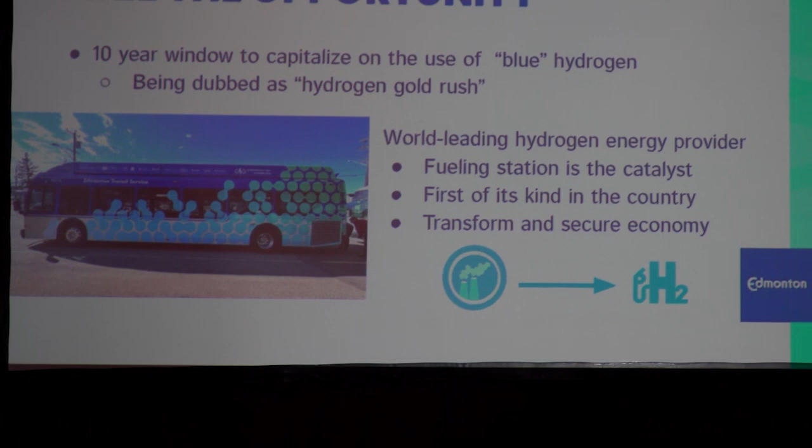We want to be a purchaser of hydrogen and encourage that industry growth around the region itself. The last thing I'd say is, for us, we're looking to seize that opportunity. It's really been dubbed the hydrogen gold rush in this industry. It's a multi-trillion-dollar industry. This is our actual bus here from New Flyer.

So it's a New Flyer FCEB. We're doing a range test on it through the weekend here when it's -20. So all the New Flyer folks are looking at me, but we're excited for what that can achieve.

We've gone through the battery electric side of the world. We know what range looks like, the environment that we're in. We're excited about the opportunity that this bus provides for us moving forward, but we're also really excited about the opportunity that this is the catalyst for change for the city of Edmonton.

We're looking to change that narrative of oil country to a more sustainable fuel, and it starts with the buses. It doesn't end here. Our program grows beyond this to buildings, to infrastructure, to other parts of the region, to look at hydrogen as a blending fuel, as something we can use on buildings. But it's all going to start with the bus side of it for us because it's our most opportune transition.

When we look at the heavy-duty side of the GHGs and the bus opportunity we have here, with 50% of our fleet almost coming due in the next little while, we've got a great opportunity to look at that conversion and really drive the window on change for the hydrogen economy in Alberta.

And like I said, it'll go beyond these buses themselves. But we're really excited about what this means for us and what it means for the future of transit in our region, and obviously what it means for our ability to compete on a world stage in delivering hydrogen to the world too.

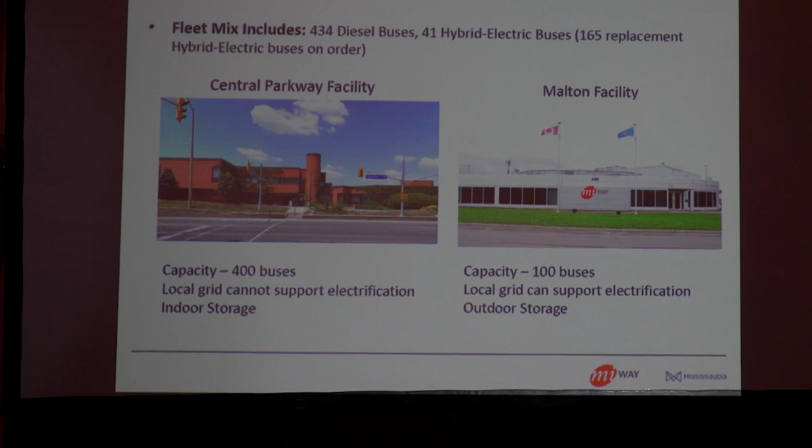we were told by the local utility that frankly there's just not enough power in the neighborhood to support the electrification of that facility. And oh, by the way, unless a lot of your neighbors become energy hogs, they've got no plans of upgrading the local network. So if you want to electrify that facility, you're going to have to pay for some significant upgrades to the local electrical grid to feed that. So that's a big challenge for us.

The second location is up at Malton, smaller, about 100 buses, but of course it has outdoor storage, but there was space for a fueling facility, whereas at the other location there wasn't. So our project ended up being up at Malton, and it's outdoor storage, which is something nobody's really done in the North American context in what I would call moderately cold weather. It's probably not Edmonton scale, but certainly cooler than California. So our project is really going to be based at that Malton location.

And we currently running all diesels. We have a number of hybrids on order, which will help us in the short term. But based on our study, we can meet our 2040 targets, provided that we completely transition to zero-emission buses starting in 2028, which seems a long way away, but really isn't when you look at all the challenges of electrifying garages and things that other people have talked about.

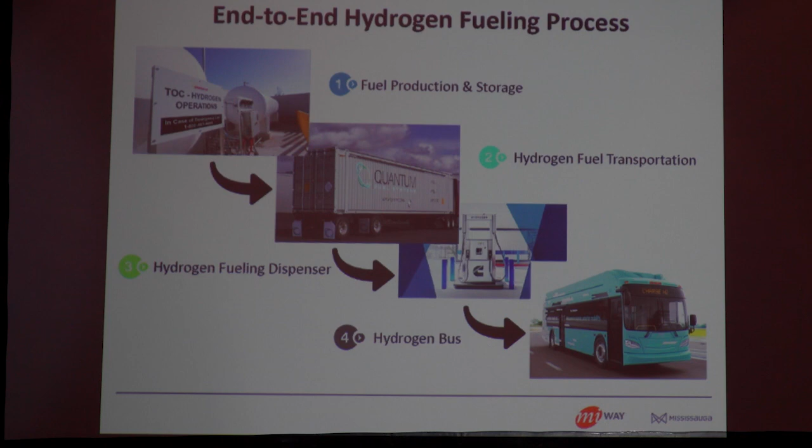So we worked on developing what that would look like. So basically compress it at the electrolyzer, put it into the tube trailer, drag the tube trailer to the bus depot. You need a bus dispensing, you know, for the fuel at the garage, and then of course you need the bus. And so you've got the production, you got the transportation, you got the dispensing, and then of course you got the consumption, an end-to-end fueling solution.

And these are some of the benefits of hydrogen. You can see them there. They're pretty obvious. One of the key things about this project is it's scalable. We started with 10 buses. Obviously, the economics are really tough, but you know, even if you double it down, it gets expensive. And but you know, there are lots of benefits, but you got to start somewhere.

And to some extent, this project's been suffering from what is known as the chicken and the egg, which comes first. Well, you need both.

And our current challenges are availability and the source of green hydrogen. It's really limited and it's really expensive, particularly when you look at having to buy electricity at full market rates, which just makes it so much more difficult, particularly on Ontario. And you know, the production really depends on, you know, okay, can I do it in off-peak power? Is the demand high enough that you can get the industrial rates? There's a bunch of complexity that goes around with that electricity pricing.

And you know, you need that end-to-end solution. And most transits really aren't set up to manage fuel. We know the bus business, we know how to put service out, we know how to fix buses, buy buses, plan service, but we really have never been in the energy piece. In other words, I have a contract, somebody delivers something to my doorstep, I need it, I use it, but I don't have to worry about anything that happens beyond the pump.

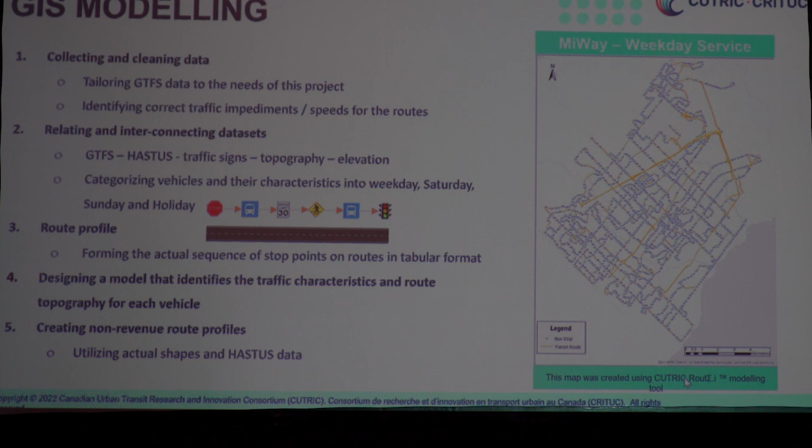This is just the feasibility and phase 1 that Geoff mentioned. When we're talking about the whole implementation work, there are more elements attached to that. So in the GIS modeling work, there's a little bit of an example on how we are doing it. We are going from weekdays, holidays—we are collecting very detailed data.

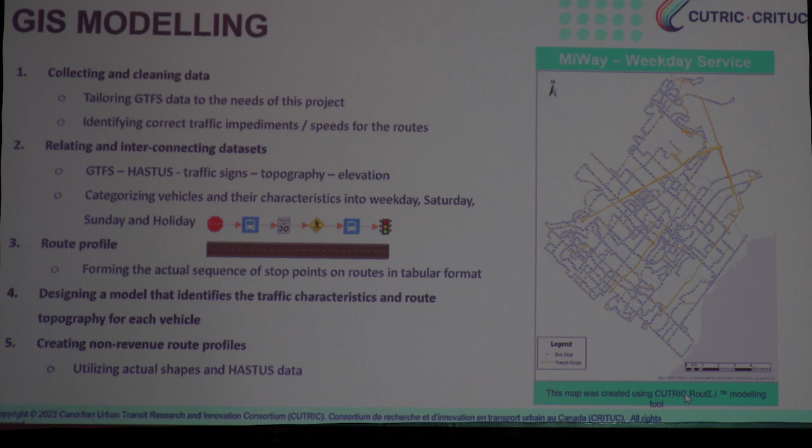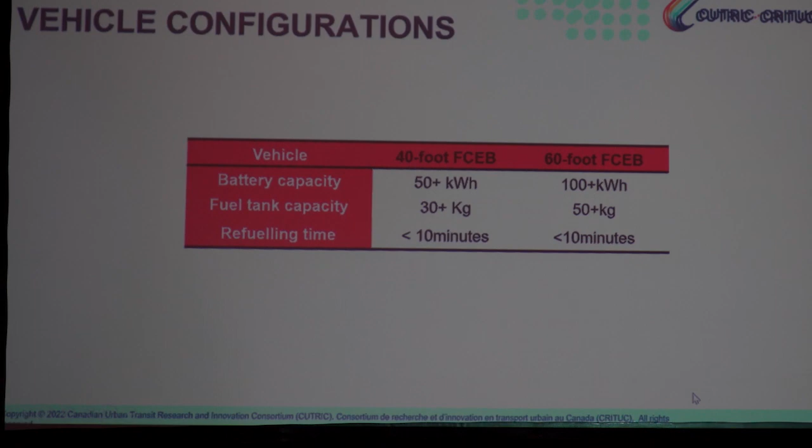Followed by that, this is a slide talking about vehicle configuration. Since it's an anonymized presentation, we are considering 2 fuel cell buses with 2 bus sizes, 40 feet and 60 feet. The vehicle configurations displayed here are anonymized. The battery capacity is approximately 50 kilowatt-hours for the 40 feet, and 100 plus kilowatt-hours for the 60 feet. The fuel tank is similarly approximate, and the refueling time is also an approximate vehicle specification consideration. For this work, I'll be showcasing some examples of vehicles with a diesel heater and one without, but most of the examples shown here are without diesel heaters.

With that, the first step of simulation is generating duty cycle. What do we mean by that? To accurately model these buses, CUTRIC divides the whole scenario into light, medium, and heavy duty - like the best case scenario, the average, and the worst case scenario, meaning packed with people, worst climate, and so on.

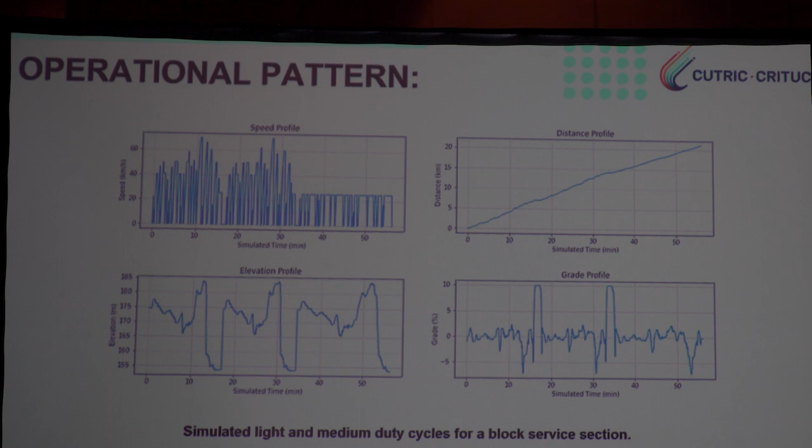These are the simulations we conduct, the operations patterns. The team does a speed profile, distance profile, elevation profile, and grade profile, and this results in the fuel efficiency. Fuel efficiency is defined as the ratio of the fuel consumed for the operation of a particular block and the total distance traveled - how many kilograms of hydrogen per 100 kilometers.

If you compare the 40 feet and 60 feet, our study showed that for weekdays we have 6.93 kilograms of hydrogen per 100 kilometers, and Saturday and holidays are similar. However, with medium and heavy duty, consumption increases significantly, and the same with 60 feet buses - it's definitely higher. With the diesel heater, consumption is lower compared to without it. One can ask why we're doing both - just to understand what the present possibilities can look like with or without, and what the consumptions and fuel efficiencies can be.

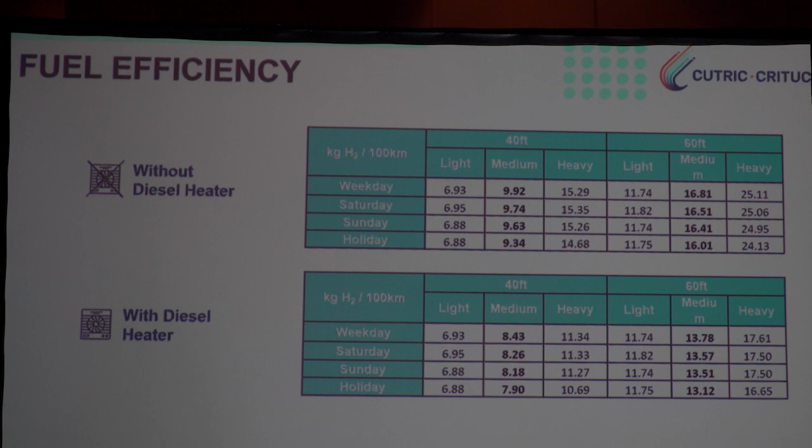We're going to explain one of the scenarios, without a diesel heater. What we understand is we're going to talk about the success rate of these buses, and when we talk about success rate, we consider two scenarios: one without any refueling, and what happens if we add another refueling option.

The hydrogen fuel consumption - this data showcases how much kilograms of hydrogen you really need, and this is again without the diesel heater. I think I have a slide with the diesel heater too, but more or less the ballpark numbers are mentioned. The weekly consumption for 40 feet is 72,000 kilos - this is just without the diesel heater.

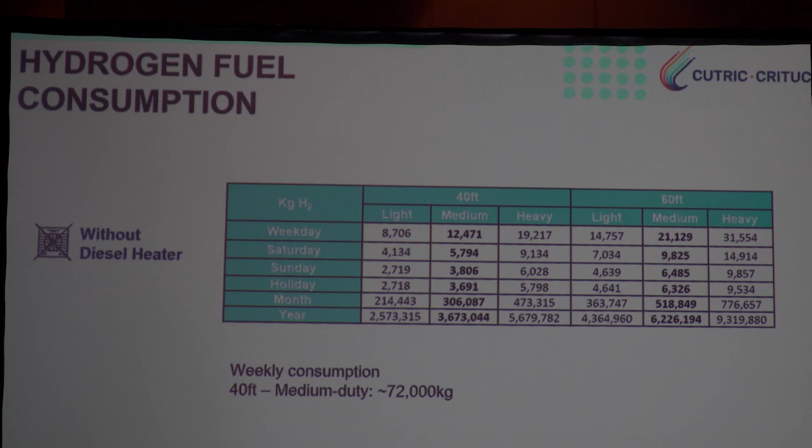Let's quickly talk about - how much time do you have? Two minutes. Oh, of course, multitask.

All right, so now we're talking about GHG. This is the biggest benefit for fuel cell electric buses. As you can see in red for the diesel buses, we have a pretty large emission, and as soon as you introduce the fuel cell, that is the biggest achievement here.

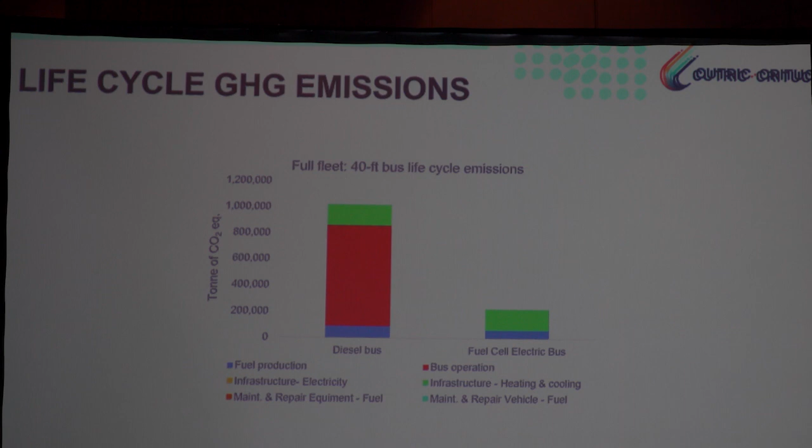Now we're going to talk about the total cost of ownership. That's also part of our work, and it shows that if you consider 12 years of service, CUTRIC did a calculation for MiWay for 10 buses for pilot and then full fleet of 100 buses. It's mostly the capital cost for vehicle and fueling, operational cost, fuel cost, maintenance, midlife replacement, and environmental costs that are considered. There's a lot of conversation around operational cost that needs to be considered in government funding, which is not currently present, or is part of the conversation. But CUTRIC does that study for you and gives you a number for how much that operational cost is.

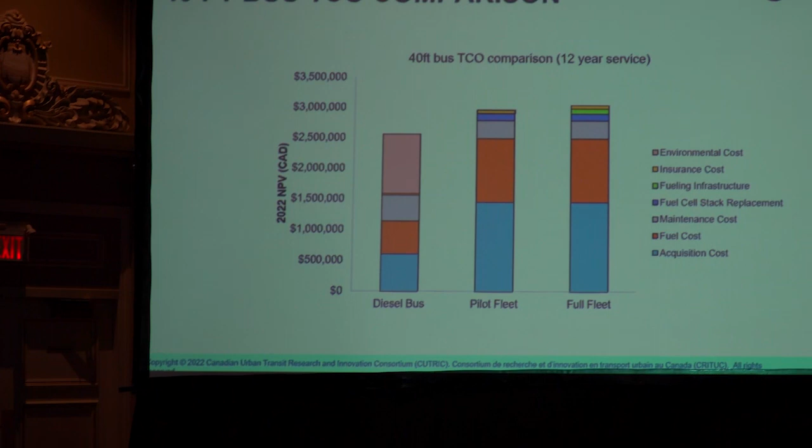Just a quick comparison - I don't have much time left, but as you can see, when it comes to cost, we are not gaining much out of it. The cost of hydrogen is definitely still very high per kilogram - that has to come down first. Second, diesel is still cheaper, so the gain is mostly when it comes to GHG emission reduction.

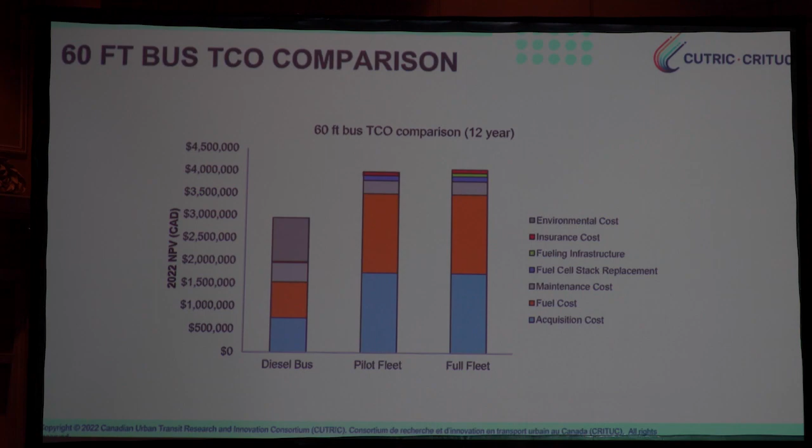But with all that, this is more or less our work in a very small gist, but if you have any further questions, you can write to us. I'm pretty sure experts can talk about that.

Thank you so much, Sudesh. Good bird's eye view.

That's the whirlwind tour. So the end message there is basically it's expensive, and it's more expensive than battery electric buses. So why go to hydrogen fuel cell? Two primary reasons: long range, so ease of deployment, and of course the seasonal component, and then the GHG reductions. And of course in Ontario, pulling hydrogen off an electrolyzer, off a green grid of nuclear and clean energy is a different story from pulling hydrogen off a grid in Alberta.